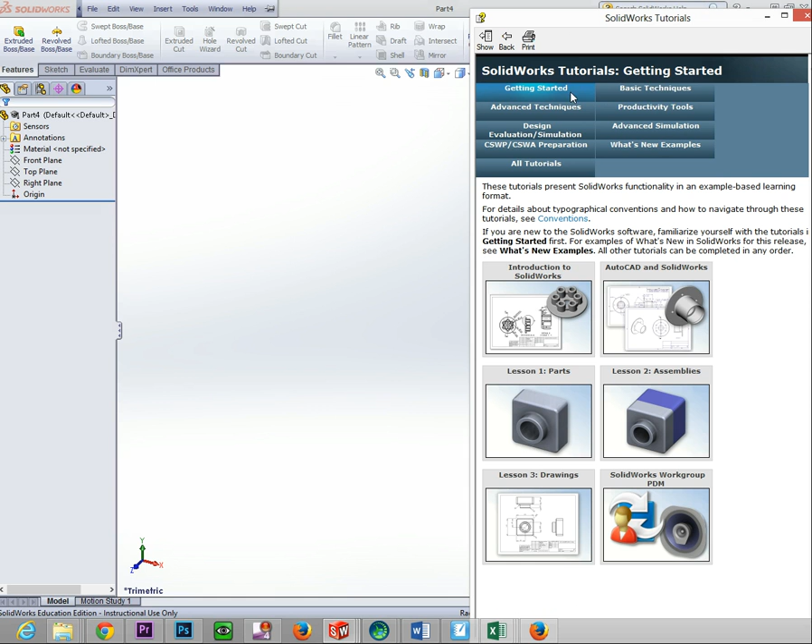You have this little side window right here. This will pop up, and you want to go to lesson 1 parts. You're going to do lesson 1 parts, you're going to do lesson 2 assemblies, and then you're going to do lesson 3 drawings.

You're going to do these 3 right in order. What's going to happen, you're going to end up creating these 2, and you're going to put them together. An assembly is when you put 2 parts together. So that's what you're going to learn how to do in this tutorial.

But you're going to click on parts, and it's going to give you this little window. Down at the bottom it says creating and saving a part. You would just click this little link, and it takes you to the first step. The first step is to create a new standard document.

So if you don't know what to do, you would click this little button, and it shows you what to do. You go to new document, which would be right here. So you're going to click this, and it shows you new document. So you would do that.

I already have that open. If you don't know how to save by now, you would click this, and it shows you where to save. You would save this to your documents folder on your ID number where you created the drafting folder.

To go to the next step, though, you go down to the bottom. If you want to go back 1 step, you would use the previous topic. So next step, next topic, you would pick creating the base, and you're going to create the base.

Okay, and basically you would go in and you would do an extrude. The way you do that, first of all, it says extrude rectangle with 1 corner on the origin and dimension as shown. Okay.

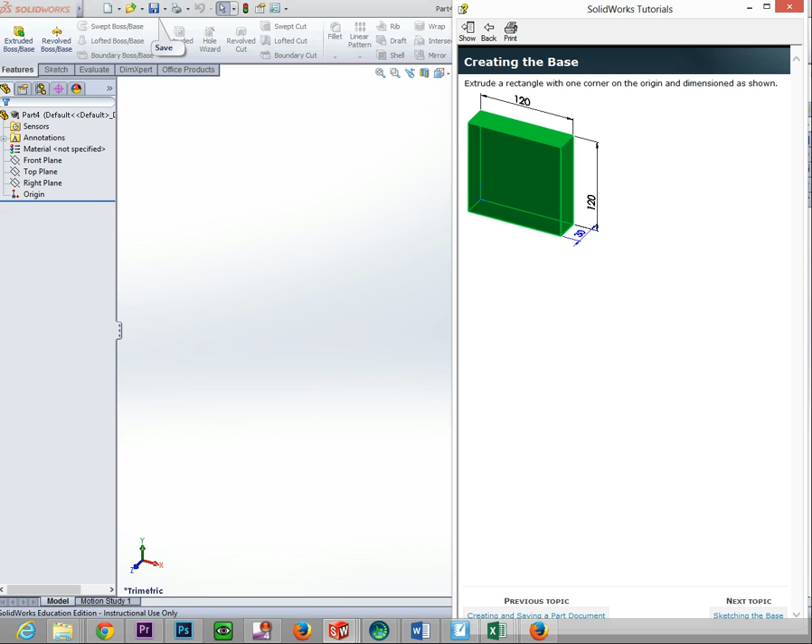So you should know how to extrude something. Remember, you just go to extrude, and you're going to click the front plane. And you want to make the box. So basically, you would come over here, click once, hold it down, and drag up.

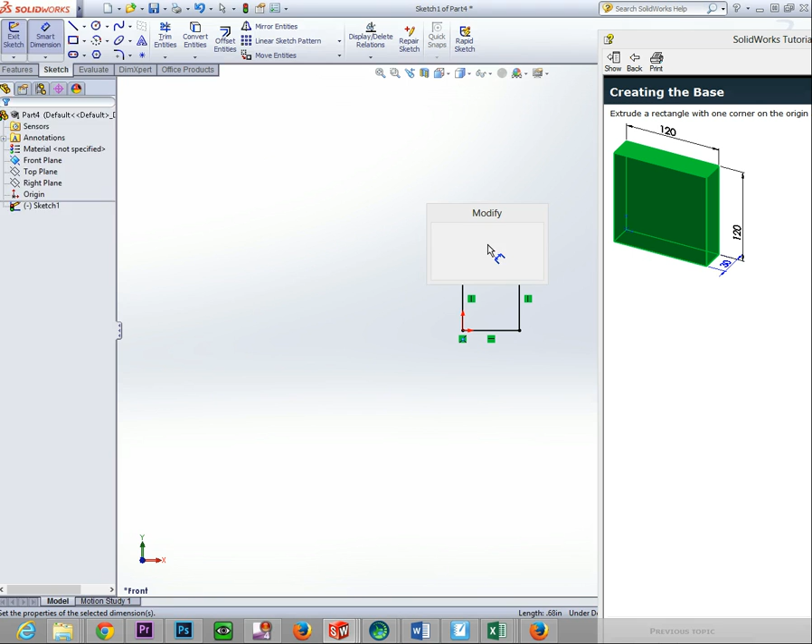And then you would smart dimension, and you would put in 120. So 120. And then you would put 120 for this.

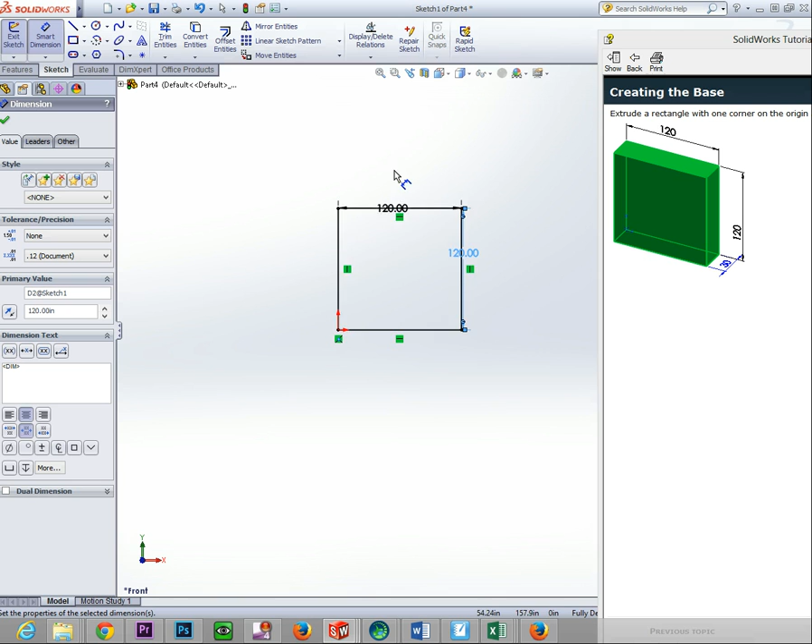Now remember, this should be millimeters. Okay, so if I click this, it should be, that's inches. So I want to change it to millimeters.

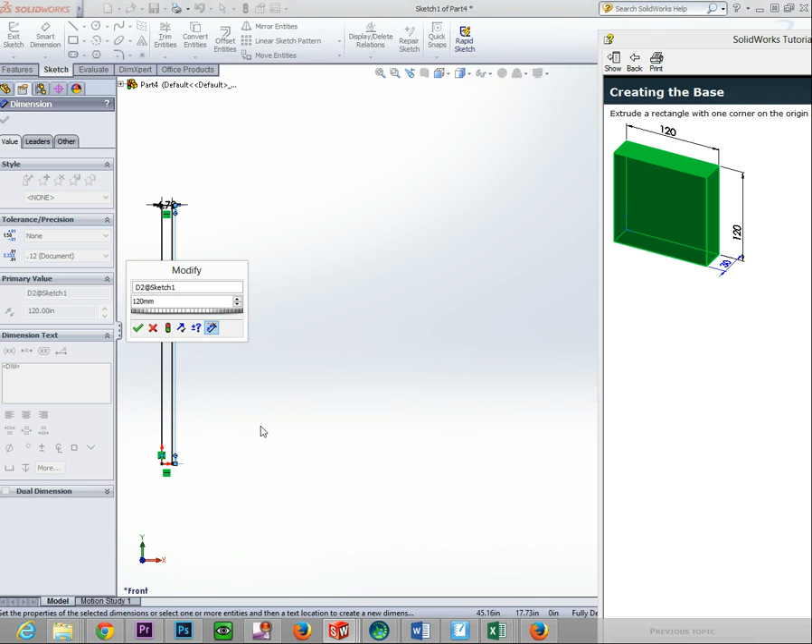Type 120, go to units, and go down to millimeters, and say OK. And then double click on this 120, type 120, and change the units to millimeters, and say OK. So you do want millimeters. Okay.

Okay, if yours is displaying in inches, what you need to do is go up to the top, go to your options up here at the top, click options, and then you need to go to document properties and go down to units, which is this one right here.

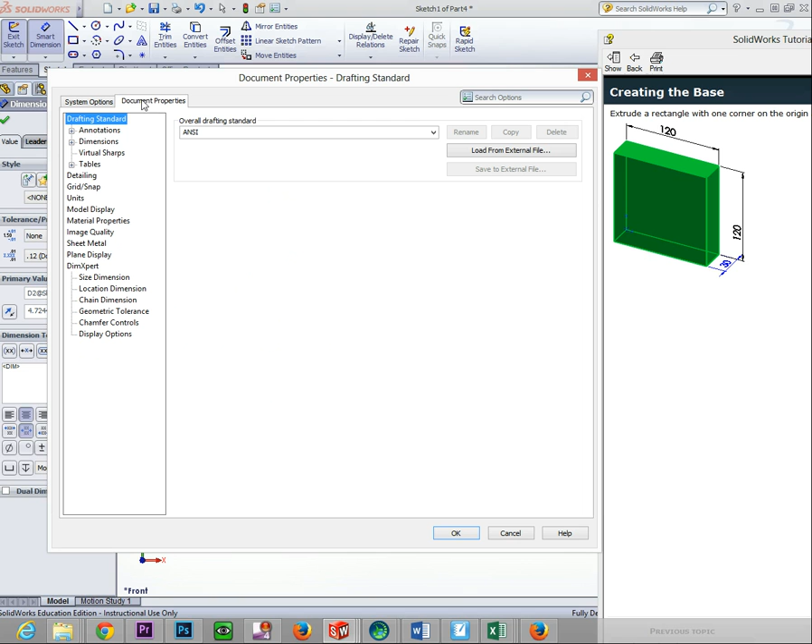Click units, and right here it might be IPS. You want to change it to mmgs, which would be millimeters, grams, seconds. You want to change it to that and say OK. Now it would be displayed in millimeters.

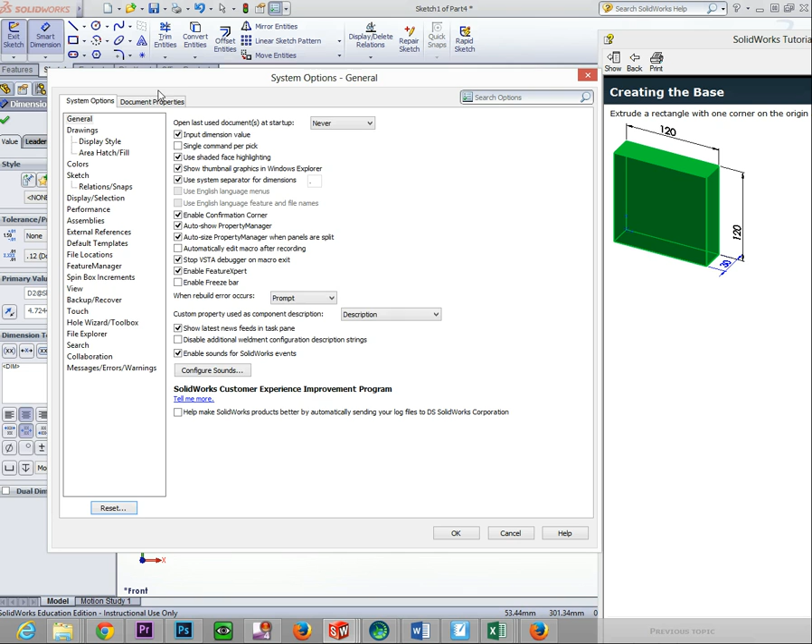So if you need to go back and change it to inches, you would always go up to options, document properties, units, and change it back to inches if you need to go back to inches. Okay, but that is to set it for millimeters.

So now you could follow along with this tutorial, and you would just go to the next step, which would be sketching the base. And basically here are the steps.

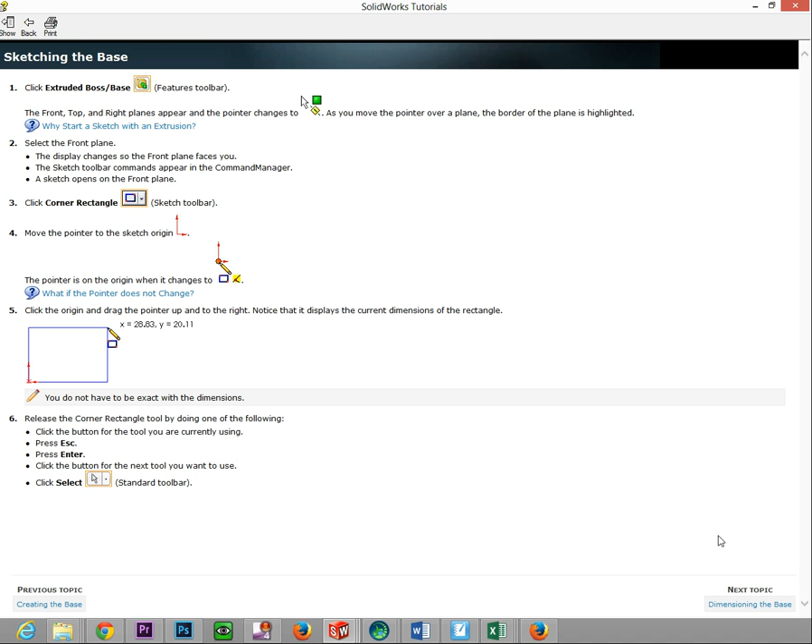If I click this button, it tells you extruded boss base, and it shows you all the stuff you need to type in how to do it.

Okay, if you didn't remember how to do that, then you would go to the next step, and dimensioning the base, it shows you how to dimension it.

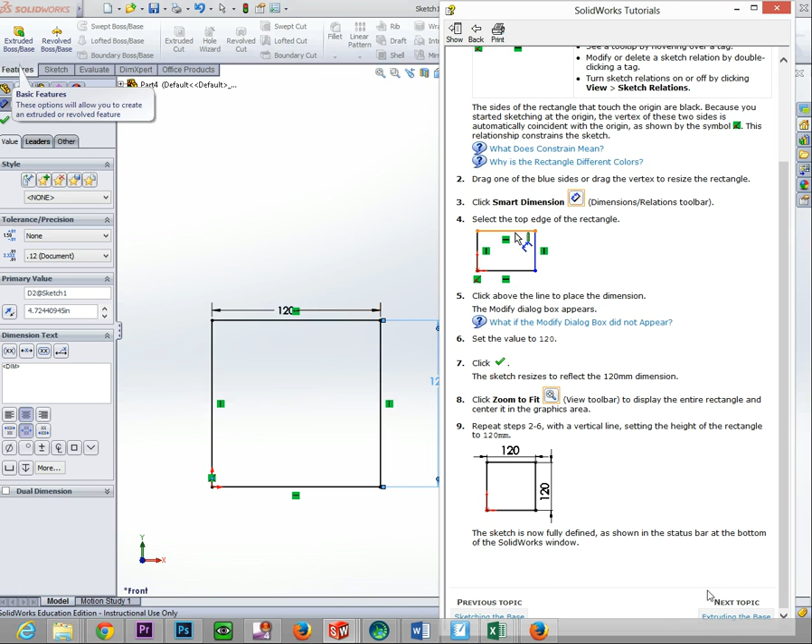Okay, you can go to the next step since we've already done that, and then here's how you would extrude it out, and it just keeps showing you how to do stuff.

If you click this, it shows you how to exit sketch. So you can click these little tools, and it tells you where to find this stuff at.

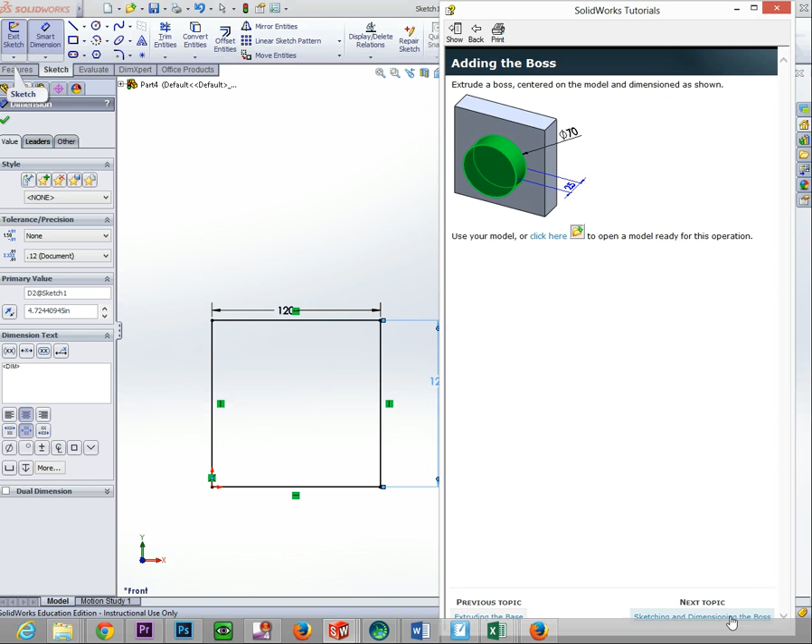Okay, but you would extrude that out, and then you go to this step, and you would do this next step. That you're going to create this piece. You would click this, and it would take you next, and you would go through the process.

So I want you to go through this process of building this piece, save it as assembly part 1, and then you're going to create the second part of the assembly as assembly part 2, and then you're going to do a drawing for the assembly, and you will print that out and turn that in. Good luck and have fun.